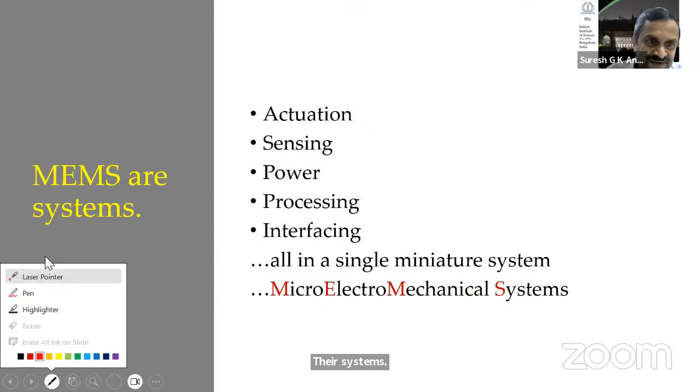The first thing we need to note about MEMS is that they're systems. The 'S' here is really something we need to pay attention to - micro electromechanical systems, they're systems. They're systems because they can have actuation, sensing, and power - there are power MEMS too - and processing, where you can have electronic circuitry. They can also interface with the external world. Not all MEMS devices have all of these, but if somebody wants, they can integrate all of them into a single MEMS chip. The sensor, MEMS chip, or actuator will be small, all integrated, and we can interface with the world.

That was the really exciting thing everybody felt at the beginning of the MEMS field - that they're small. But that's not the only reason to be excited; they also combine a lot of things. In fact, many of you probably know that MEMS devices are in many of the consumer goods we use. One of those is the smartphone, which has MEMS.

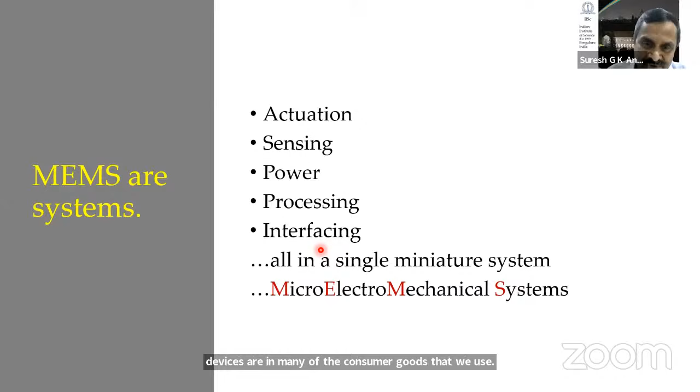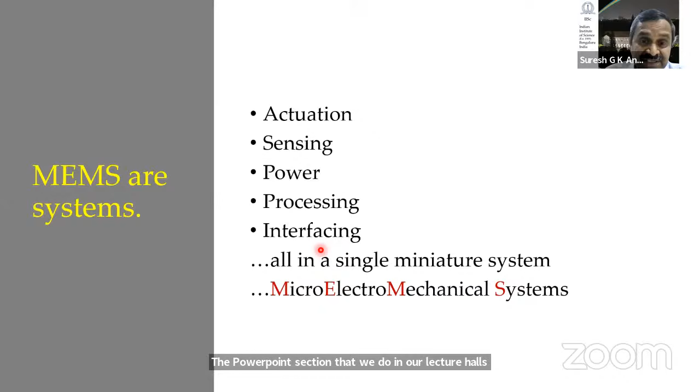And also for academics, one of the consumer goods is the projector we use - the PowerPoint projection we do in lecture halls and classrooms everywhere uses digital light processors. That is one of the early applications.

If you think about that particular device - I'm a mechanical engineer, so when I think about it, it's really exciting, because there was no other mechanical system like this before: the digital light processor. There are a lot of mirrors, all individually controllable - millions of them, individually actuatable. Such a thing did not exist in the world before. Big mechanical systems like airplanes, ships, trains, and big machines do not have so many moving parts, not millions. An airplane might have a lot of fasteners in large numbers, but they are not moving.

To have something with a million parts moving, each individually controllable, is really amazing for a mechanical engineer. And since MEMS is a system, it involves lots of things, so a lot of different kinds of engineers get involved. From the mechanical engineering viewpoint, these are amazing machines because they have an unprecedented number of moving parts, each individually addressable and controllable. People in other disciplines find similar things exciting - that's the nice thing about MEMS. It's multidisciplinary, and everybody finds it exciting.

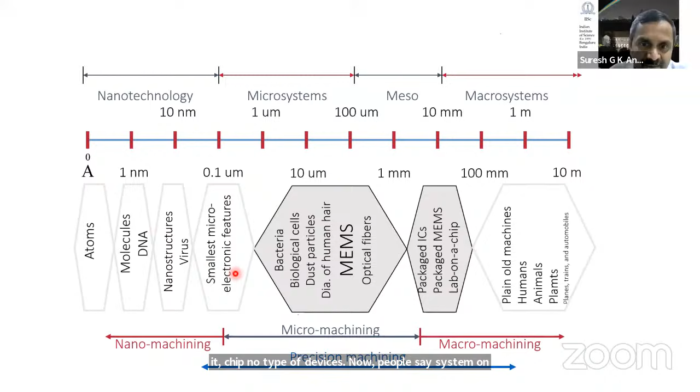It's also nice to see that many things here - bacteria, biological cells, optical fibers, and other things - are of the same size as MEMS. In fact, people say that once MEMS came into being, it became like a living lab, because biological cells are of the same size as MEMS devices. So now we can probe the biological world, unlike just looking through a microscope and studying - now we can actually manipulate them, and that was really exciting for biology.

And then chemistry, and of course a lot of physics people are also involved, and a lot of engineers. What enabled all this is machining - what we call micromachining or microfabrication, as opposed to macro machining or nano machining. We are talking about micromachining here, where it's a fraction of a micron all the way to a couple of millimeters.

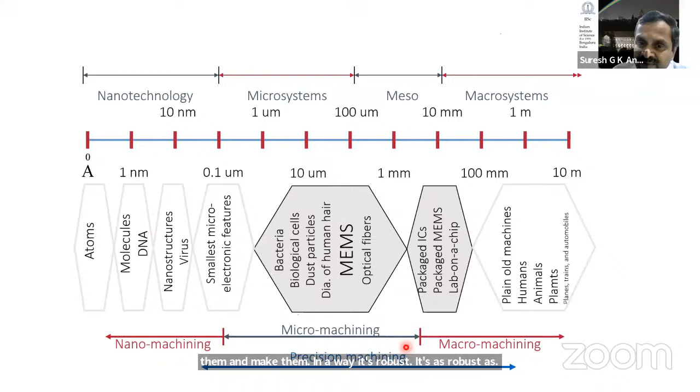That's where we can carve out features, and whatever designs we make, we can actually make them, and make them in a way that's robust. It's as robust as electronics, because all these processes of MEMS are derived from microelectronic processes.

And they coexist, and that is the really wonderful part of integration. That kind of integration does not exist in any of the machines that we know. Sensors, actuators, power, and processors, everything, and of course data storage, everything is integrated in some sense. The only other thing I think of that integrates so well is a biological cell, which is of course much superior, but I think people will get there.

Most of the MEMS applications are in microsensors. That's how it started, that's how it has been, and that's probably how it's going to be also. There are also some micro actuators, many of them are coming up now, filters and resonators and other things. And power MEMS also started a couple of decades ago. It's still of interest, where you can have distributed power.

One of the highlights of MEMS devices, or MEMS systems, is that everything is distributed. Like I said, in the digital light processor there are multiple micro mirrors, each of them doing something. And that is the thing - everything is distributed sensing, distributed actuation, distributed power as well.

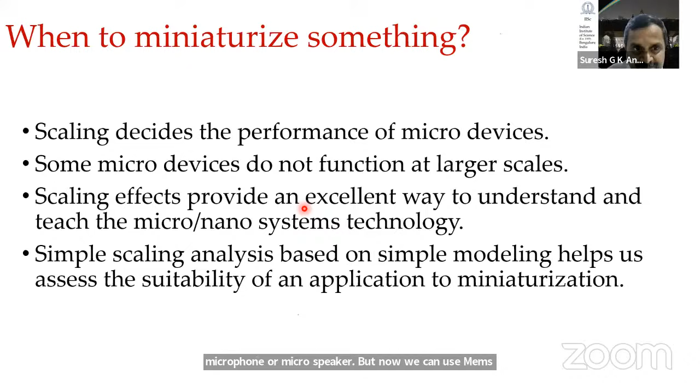Now there are a lot of papers coming up in micromachined speakers. That's a new area, right? Because we call it a microphone or micro speaker, but now we can use MEMS technology to make it. What are the new things that you can do with it? So people have, I would say, played with light because of MEMS devices. Now you can play with sound also. Similarly, you can play with a lot of other things.

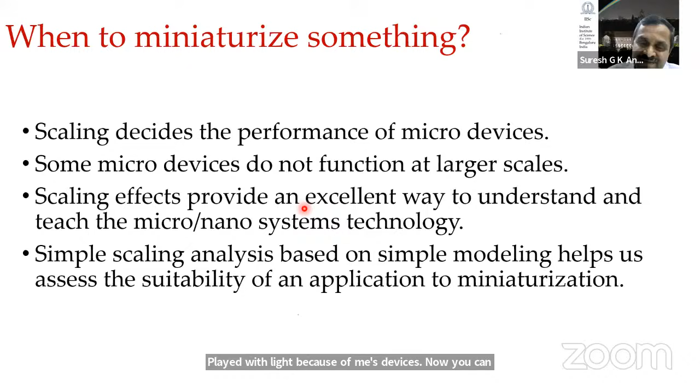And the scaling effects also enable you to understand and also teach. If those of you are in the universities, the teaching is very exciting when you think about MEMS, because MEMS integrate so many different energy domains. Whenever you look at them, you have this coupling across energy domains, and it's really wonderful to understand physics. Many times, as a mechanical engineer, I had to go back and learn electronics and optics and this and that to do something. And similarly, chemical engineers, when they want to involve in MEMS, they have to learn the other things. So this is the interdisciplinarity that comes through, which is really rewarding.

And that's the exciting thing about MEMS, because there are multi-physics domains involved there, or I would say chemistry domains. It's good to call them multi-energy domains.

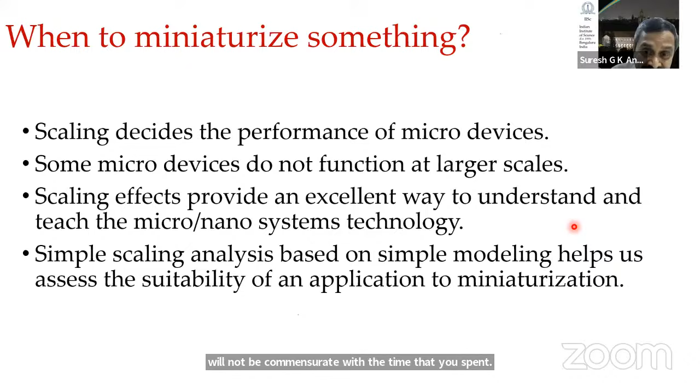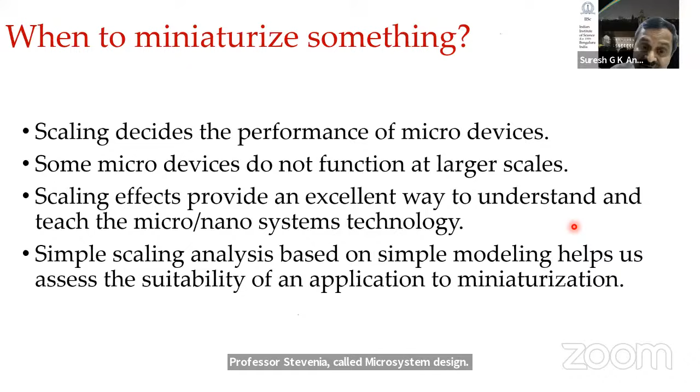And simple analysis, like what we call back of the envelope calculations, would also be helpful. You learn about modeling, how to, if there's a complicated system you want to understand, we cannot be doing full scale simulation at the beginning, because that will be a huge investment of time, and the insights that you gain will not be commensurate with the time that you spent on the full scale simulation. So you have to look at simple models, and there are excellent books. The one by Professor Steven Senturia called Microsystem Design talks about this modeling quite a bit. And I would highly recommend that you think about modeling also at the outset of doing this.

And then you think about materials. So what are materials that are used in MEMS devices? Silicon, of course, because that's what started this field. But then we don't need to stick to only silicon today, although this is going to be about silicon. That's where we start. MEMS 101 material is silicon, and it probably will be like that for a substantial period in the future as well.

But then polymers are catching up, and so are metals and even ceramics. So these things keep changing.

So if you look at the early period of the MEMS field, which we could call phase one, what people did at that time was just use whatever materials are available for microfabrication processes. They were just using those processes. That is, microelectronics already existed, and those materials, silicon, its oxide, nitride, they were being used with those processes.

And then a decade later, people started to make new processes, because microelectronics mostly was developed for making things that do not move. What MEMS need are movable structures. So people had to make new processes, develop new microfabrication processes, that I would say is phase two.

And then once the turn of the 21st century, which we can call phase three, new materials started coming with the existing processes that were there before.

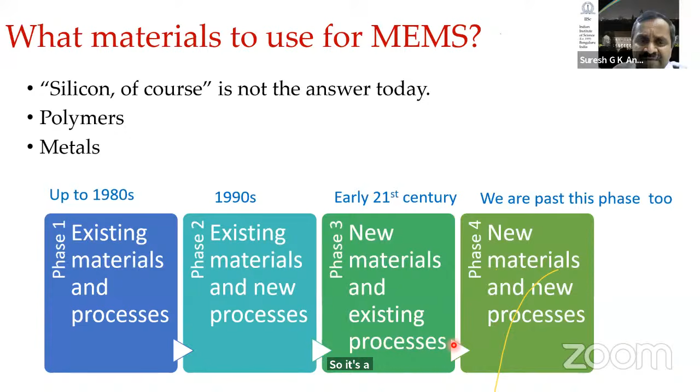These new materials are active materials, piezoelectric materials, shape memory, and magnetic materials, and so forth. They all started coming in, and then new processes for new materials. I think we're probably past this phase. Now people are trying to do even biological things, like integrating cells with MEMS, bacteria with MEMS, and so forth. So phase five is what I think you're all part of, right? There are a variety of materials, but here we'll stick to silicon.

Now let me talk about design a little bit. As I said, scaling analysis is really important, and I strongly recommend it. There are now a couple of books with the title Scaling in MEMS, and if you're interested, send me an email or send Dr. Veda an email. We'll help you find that scaling analysis so you can apply it to the device you want to design and make. And lumped modeling, this is what I said about modeling. Let's not go to full-scale simulations right away. We have to do some basic modeling to understand the device.

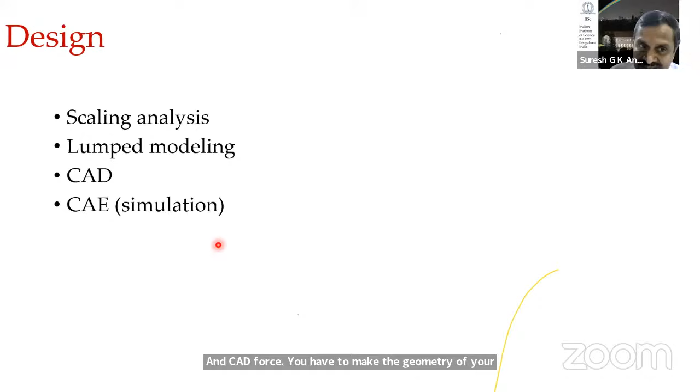And CAD, of course, you have to make the geometry of your MEMS device, and then computer-aided engineering simulation. Because of multi-physics, there are a lot of software programs available, or you can use your own thing and write in Python or MATLAB for that simulation. But after doing scaling analysis, lumped modeling, and geometry, then you go to simulation.

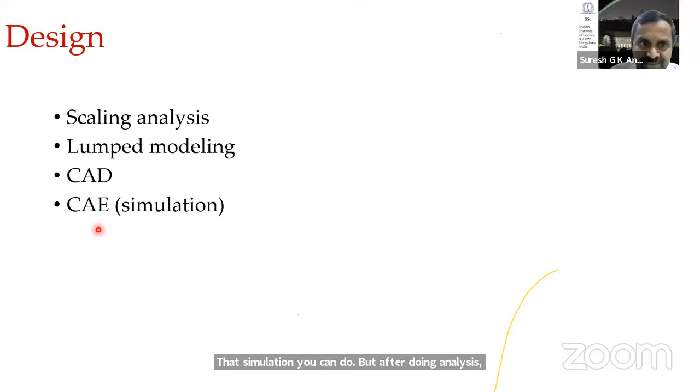And after that comes the microfabrication. This is one of those things that requires, like many things, mastery in order to do it well, and it takes a substantial investment of time. Even if you have access to a microfabrication facility—today we call them nanofabrication, but their machines are similar—you need access, and you can learn and do it, but it takes a long time. So if somebody can do it for you, you don't have to learn it, and you can focus on the design. That is the philosophy here.

That is, if there is a foundry, as we call it, a MEMS foundry service who can take your designs, make it, and give it to you, I think we should grab that opportunity. And that's why you're all here.

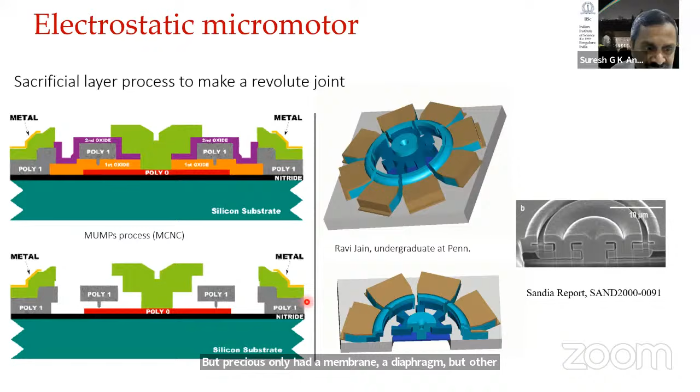And then the commercial applications took over. But the pressure sensor only had a membrane or diaphragm, while other things would go really well. Okay, so one of the things when you do the design, you have to keep the design rules in mind, and you have to really study them thoroughly and design accordingly, so that what you make will work for your device.

If there is a mistake in one of the designs in what we call a community chip, where several people are putting devices on the same wafer, same 9mm by 9mm square area, a particular design being faulty—one part comes loose because of etching, because you overlooked something—that could actually wreck somebody else's device. So design rules have to be followed well, for the success of your own design and also for not damaging others' designs. I think zonal coordinators would help you here.

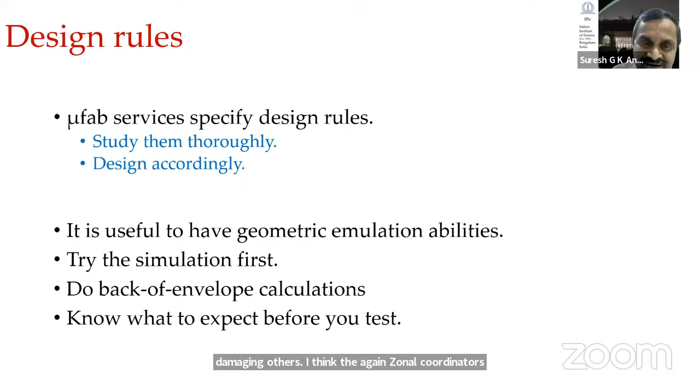Dr. Sudhamshu Shekhar is in the meeting, and also Dr. Sambudha Khan. These are the people who actually tested all the designs to make sure that all of them worked when we did the community chips in India.

It's also useful to geometrically and graphically emulate your device. CAD software is available that I'm sure you all have access to. Use the mask layouts—you can emulate, okay, this is deposited with this much thickness, or this is sacrificial, remove it. You can do all that to see that everything looks feasible, and you can simulate, or do back of the envelope calculations. Finally, before you submit your design for microfabrication, you should know what to expect from your device—is it going to work or not, and what might be the problems. If you think about all of that, it will be really useful.

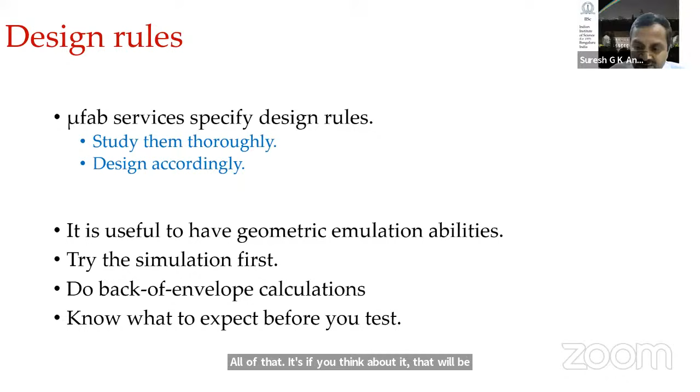Okay, what I'll do now, with a few more minutes—I think I have another 15 minutes, or 10 minutes. Is that right, Veda? How much time do I have? If we can complete in 5 minutes, then we can take some questions. Okay, sure, 5 minutes also fine.

So I will just share my personal experience with and without MEMS fabrication service available. There are some other devices that my students had made—force sensors, accelerometers, and some for biological cells, where we have these little grippers, and some fun applications like what we call a cognitive ring. At that time it was new, but now you have lots of wearable sensors.

This was one of those devices where you can see this is a biological cell—it was a breast cancer cell that is being grabbed by a little micro gripper and mechanically tested. And here is another one, which is a zebrafish embryo. They're all old ones—now people can do much more things with it.

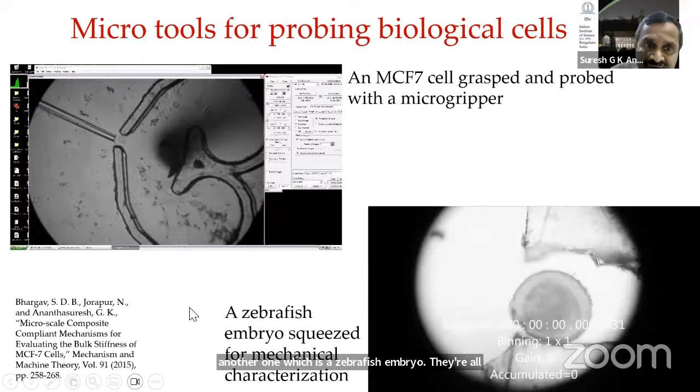We are talking about academic institutions having these foundry services for microfabrication. Some of you may be startup companies and you cannot have this kind of big investment. So what do they do? I just want to show one example, a company called Spovum—that is sperm and ovum put together.

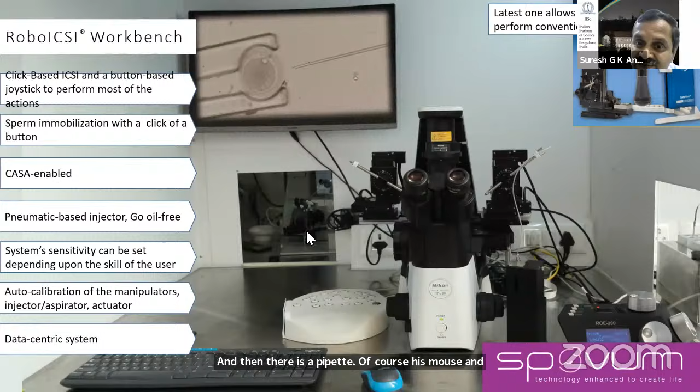They do this RoboICSI, intracytoplasmic sperm injection—there is an egg cell here, and then there is a pipette, and a micropipette that inserts the sperm for fertilization. This company is based in Bangalore; it's actually an IISc incubated company.

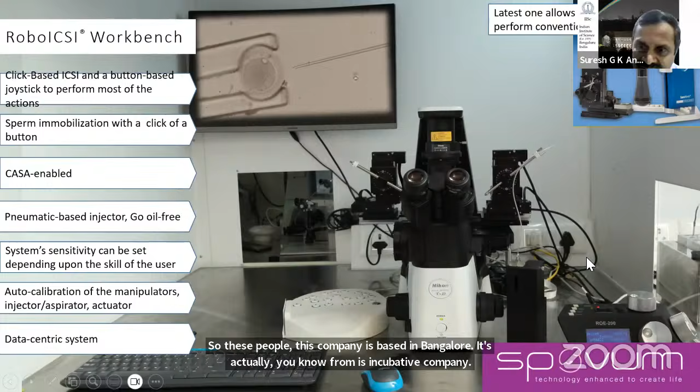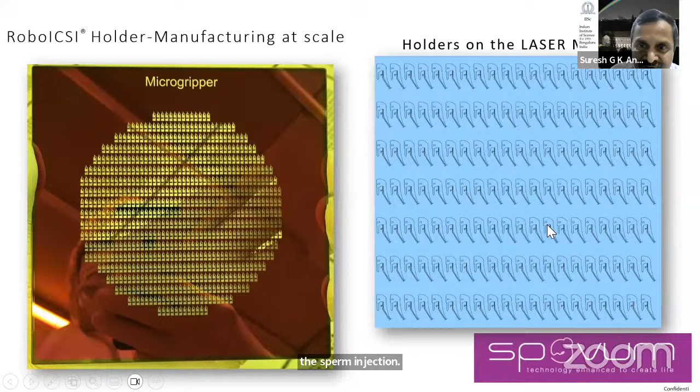You can see that they want to make this micro gripper to hold the egg cell and then do the sperm injection. This was made here because they needed lots of them—so they need a service like this, since they cannot have their own fabrication facility.

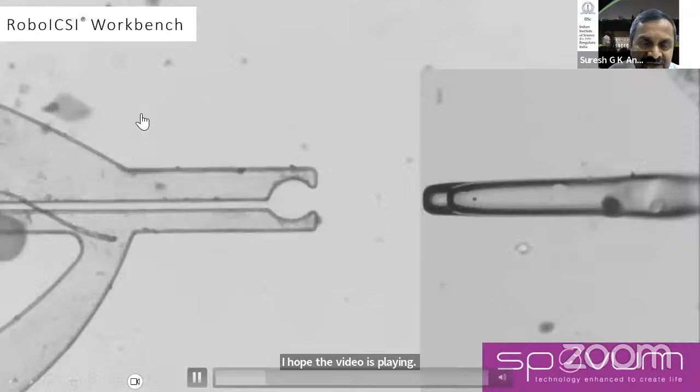I'll just play this video for you to see the real thing, to see how something like this works. I hope the video is playing—that's the thing moving in and out to inject. And this is the micro machined gripper being actuated. This is a pipette where something will be coming, and you can actuate it and so forth.

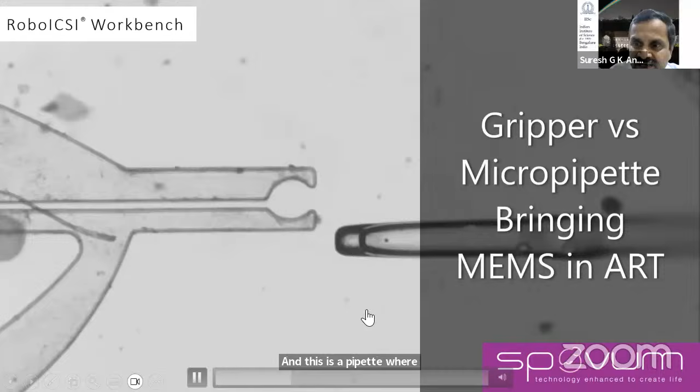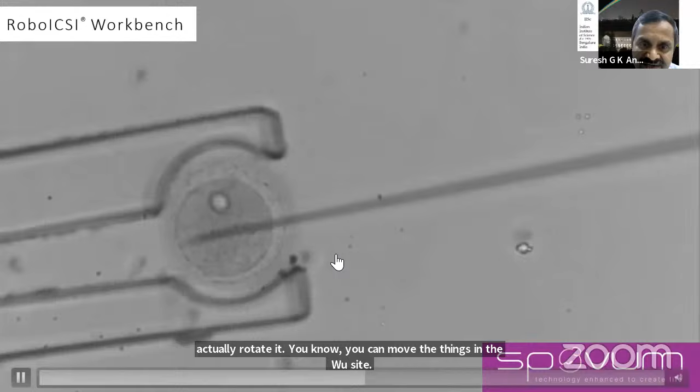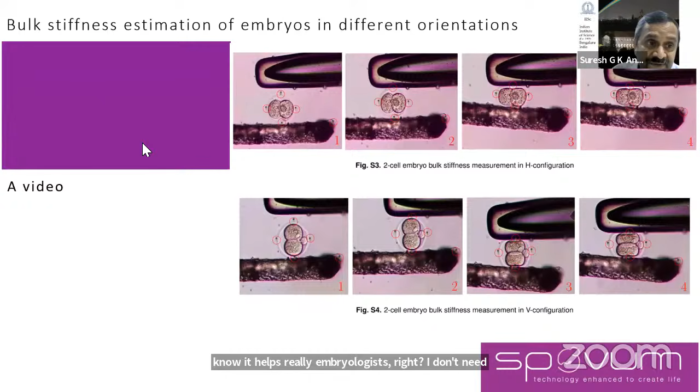This is assisted reproductive technology—you can rotate it, move things in the site before fertilization of the egg, and see it all moving. This is a glass pipette going in there, and it really helps embryologists see whether the egg cell is fertilized or not, and how it divides. This Spovum company has had a couple of babies born using this technology.

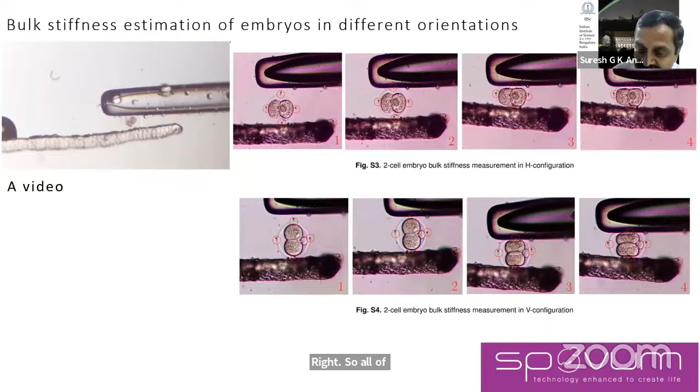Again, these are the steps that you want to do. I'll just say this and then end it, because I want to do a case study to show you, starting from an idea, how you would go through the process—these are the steps each one of you will go through, starting from an idea all the way to testing and characterization.

Of course, this group will facilitate up to fabrication. Okay, so a case study, you start with an idea.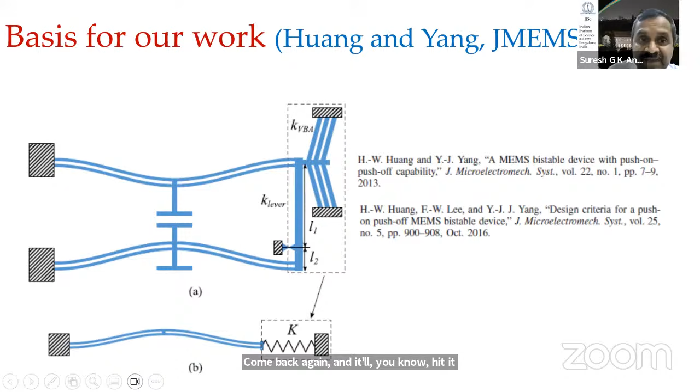There were some problems with it, so we thought we would look at them. That was back in 2017 and 18. We looked at the literature, which is something we always do in research - compare what people have done, various references. Our main reference was reference 9.

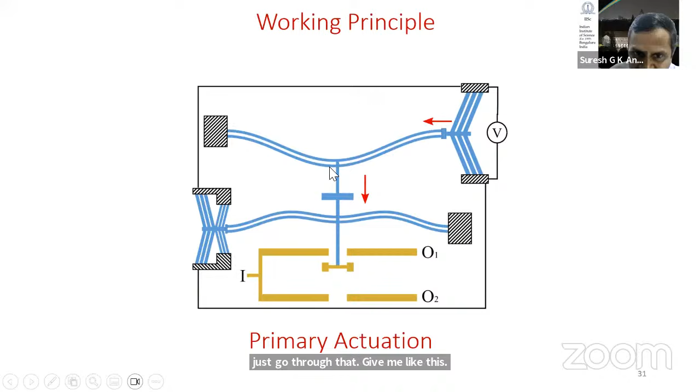First, I emphasize you have to do back of the envelope calculations, simple things, just conceptually analyze and see how it works. Let me go through that. The moment we actuate, that actuator pushes this other beam, and the beam moves there, and the switch is closed now.

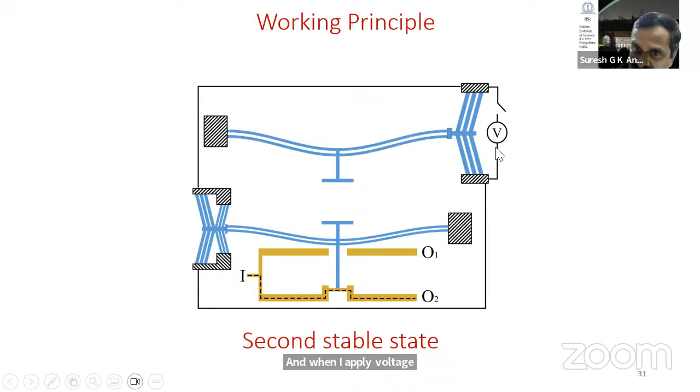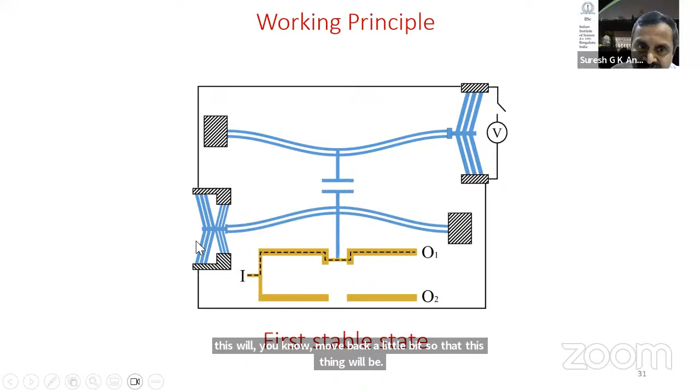When I apply voltage again, this is also electrically connected to the same thing, so both get actuated. This will move back a little bit so that it moves up, and then it moves forward to bring it back to this state. So all you are doing is applying voltage at the same place with different pulses - one for actuating at a certain voltage, another voltage to bring it back. That was the idea.

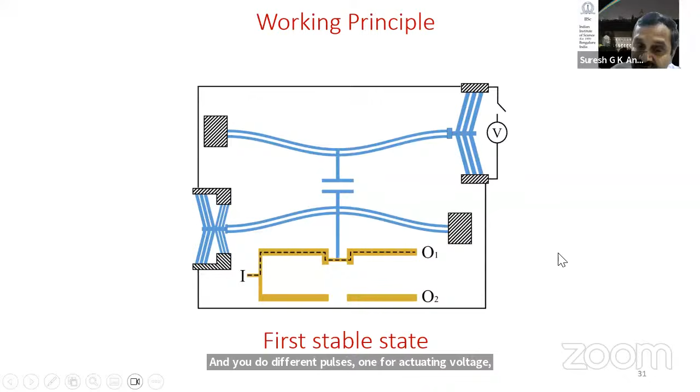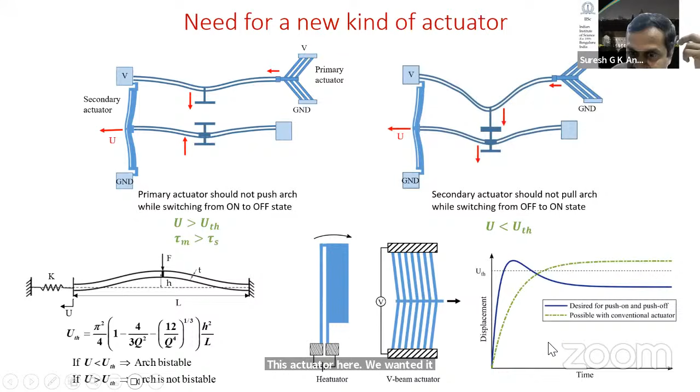We started with this, then did the back of the envelope calculations and analytical modeling for it, analyzing each individual actuator and creating a lumped model. Here we needed this actuator to go back and come forward, so a little trick was used - having these beams inclined one way and inclined the opposite way.

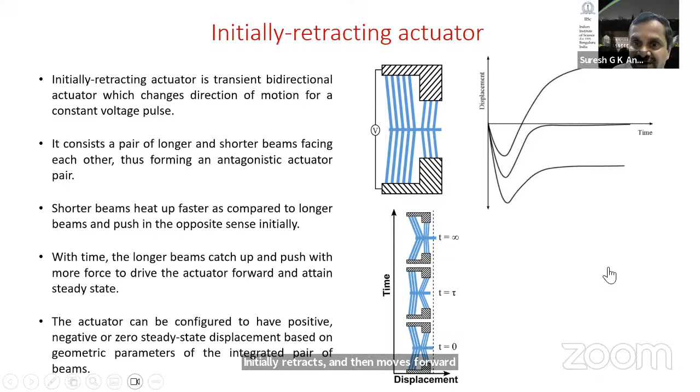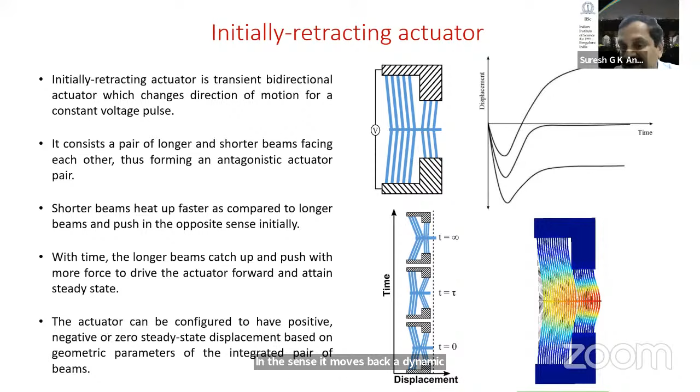This gives a way so that as time progresses, it goes negative and then positive. You just need to apply voltage, nothing else - it initially retracts and then moves forward. That was the innovation we did here, which you can see in the simulation: it moves back and then moves forward. It's not dynamics, not vibrating - it's a static simulation in the sense it moves back, though it's a dynamic simulation technically. It moves back and then comes forward again. So this is the innovation there.

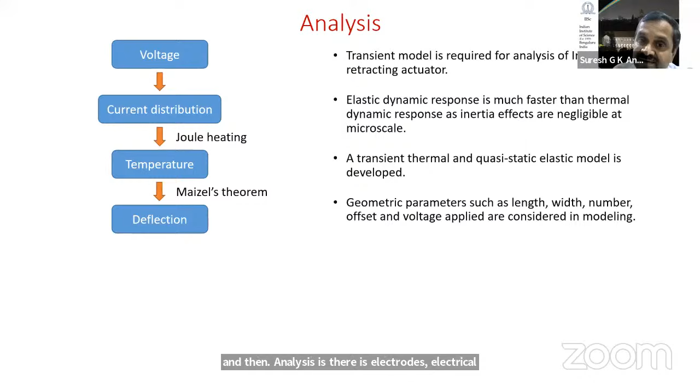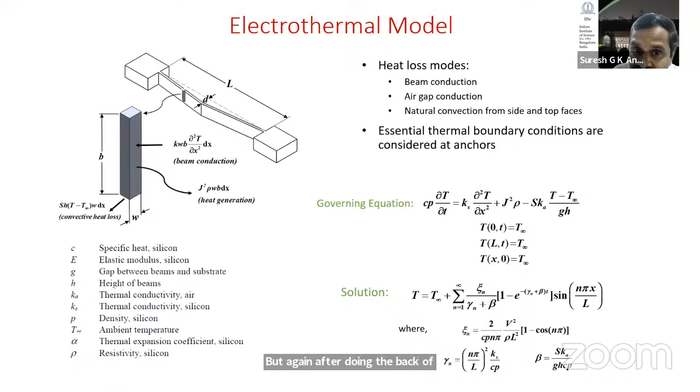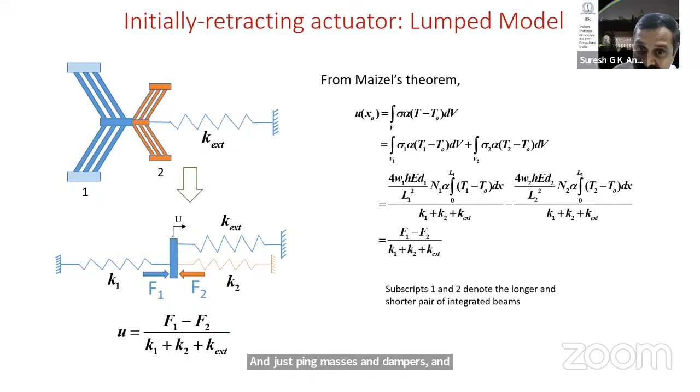Then the analysis involves electrothermal - electrical analysis, thermal analysis, and mechanical analysis. You have to do this, and there will be a lot of governing equations and partial differential equations to solve. But after doing the back of the envelope calculations, if you come to simulation, that will be really good because by then you would have gained insights and understood your device very well. We did all this analytical modeling with spring, masses, and dampers to understand the device well before going to full-scale simulations.

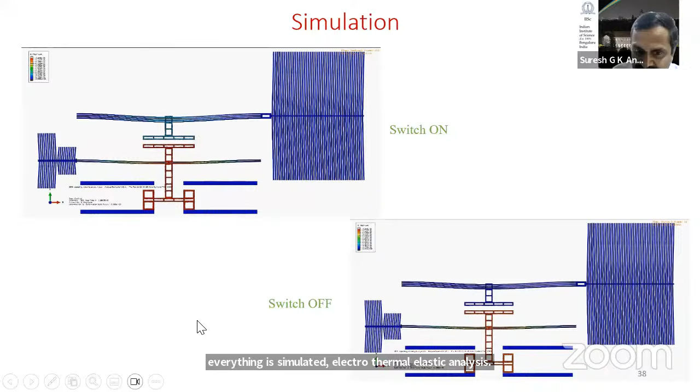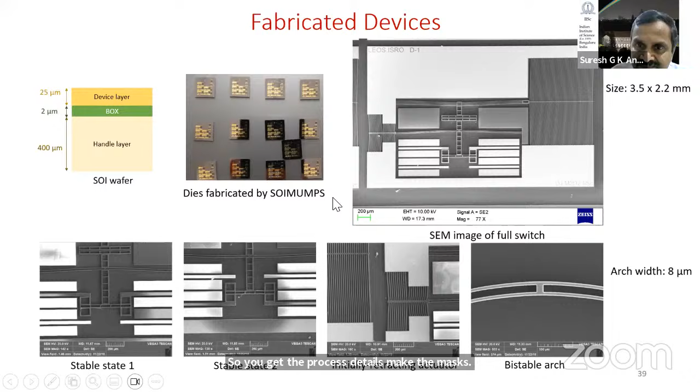Now you come to finite element analysis, where everything is simulated - electrothermal elastic analysis, switch on and switch off, as you see here. Once you reach that point, you're ready to make your mask layouts. You get the process details, make the masks, and send them off. Then you get the devices and all the SEM images and pretty pictures you want, and you test the device. I'll cover this testing and then stop here.

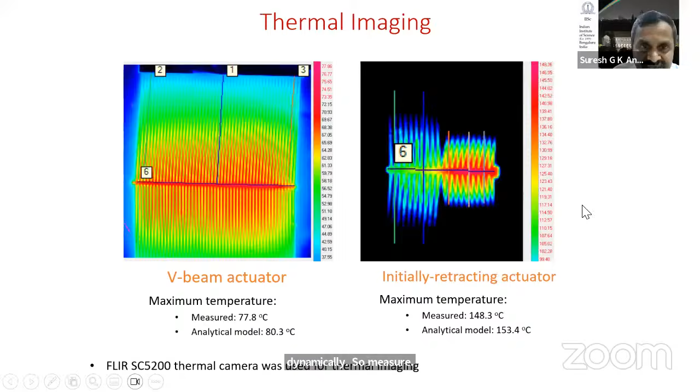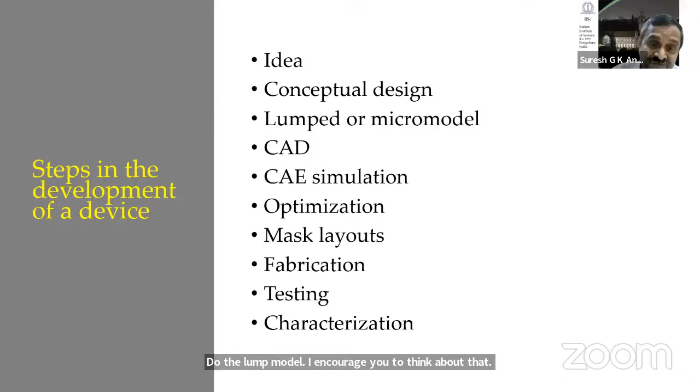So this is the process you would go through: you start with an idea, do conceptual design, do the lumped model - I encourage you to think about that. Then you go to detailed design and simulation, optimization if needed, and then mask layouts and fabrication. I'll stop here, and you should start thinking about which application domain and which device you want to focus on.